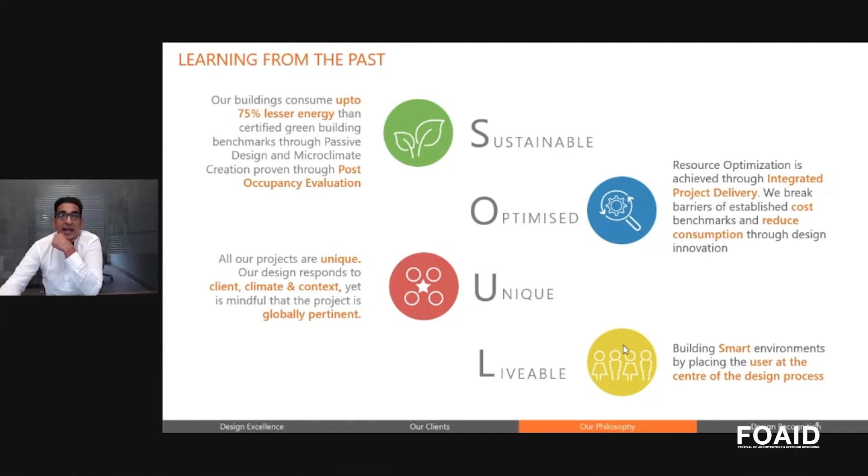With these 4 parameters, over the years till now, and then I'll come to our post-pandemic condition, we've successfully managed to reduce from green building standards 70% reduction in energy consumption by pretty much deploying what we already knew, but using computational strategies to be able to simulate and emulate high-performing vernacular buildings.

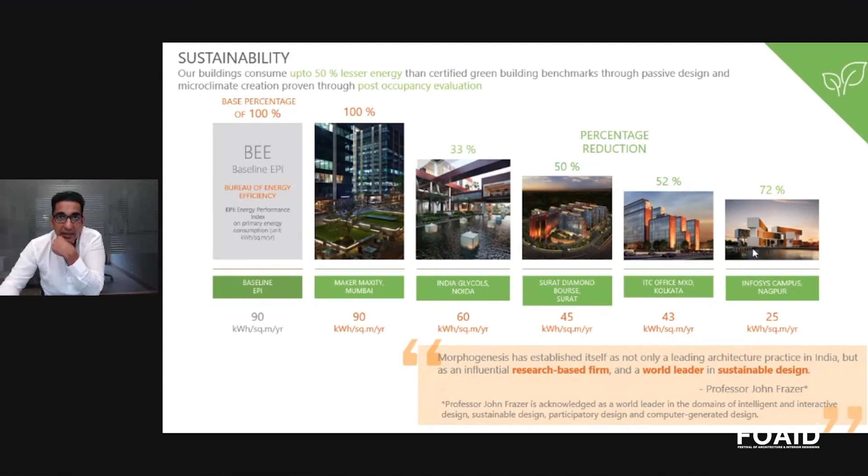In optimization, we laid down very strong performance criteria. We said we'll keep the cost of the project the same, because we don't believe that in this part of the world, a high-performing green building should cost more. If anything, it should cost less. With these metrics, all our projects began to follow suit.

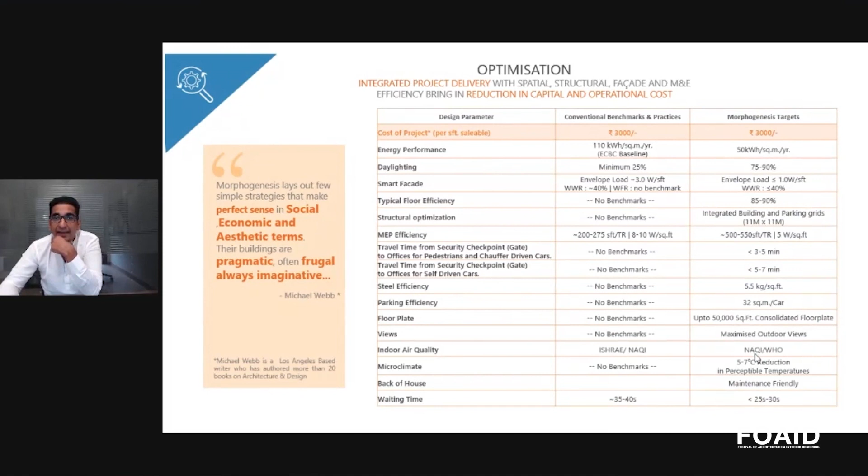Now, if you notice, a lot of these metrics are physical. They're based around energy, daylighting, facade performance, overbuildability, structural optimization, MEP. By and large, we discovered that you could take half of what we were really using and knock it out. We mapped a lot of other human factors of travel time, and this is all pre-COVID, and a lot of our projects were performing to these standards.

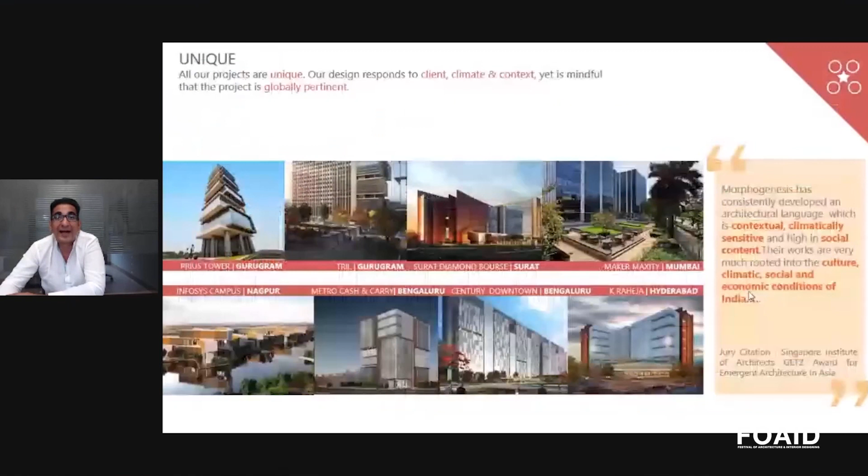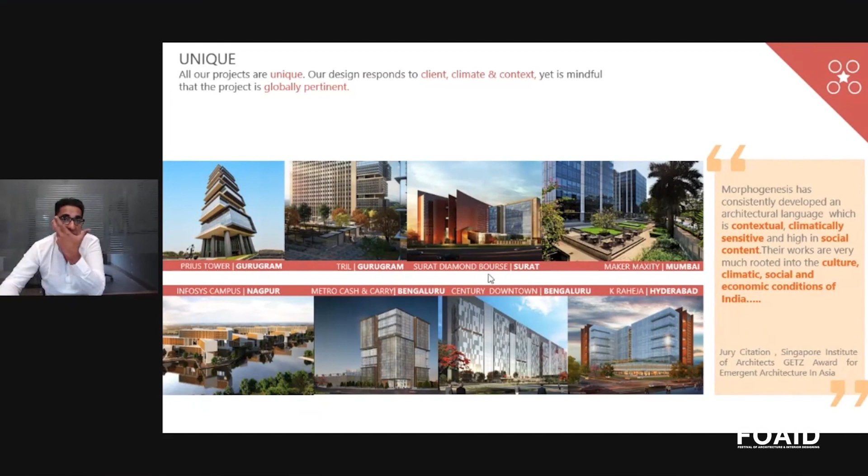And I will come very soon to why I mentioned this in terms of optimization. Of course, uniqueness I've spoken about. I won't take too much time here, but the idea really was that all the projects should respond differently to their typology, to their climate, and livability.

Last but not least, incorporation of highly useful outdoor spaces, but made comfortable through microclimate creation, ensuring universal accessibility and design, looking at every single horizontal plane that exists in the building, which is outdoors, and creating outdoor activities in them. Looking at a very strong relationship between the inside and the outside, infusing art and culture into architecture and making it available to the people in the city.

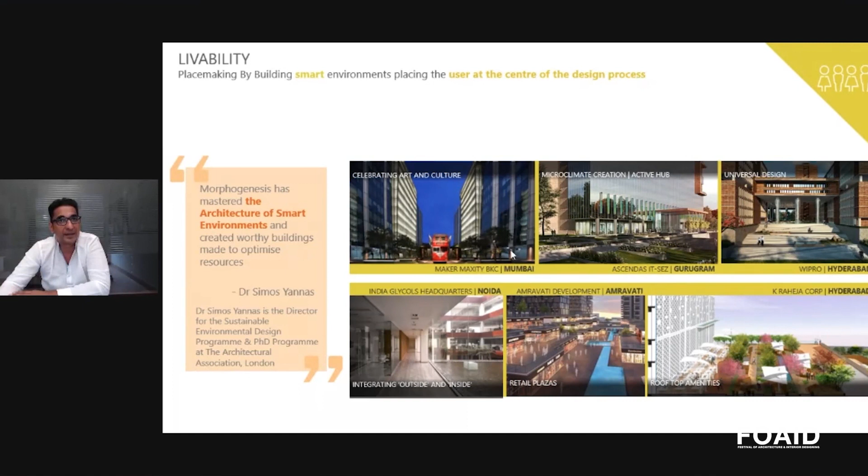This was our high focus for the last decade or two of practice in terms of sustainability and optimization. So, good passive design to save energy, good optimization to save cost and overbuildability, focus on the uniqueness and the local crafts of the area, and make sure people are comfortable and your buildings are highly livable. These are 4 projects that I'd shown last year, some complete, some ongoing, and we looked at them again.

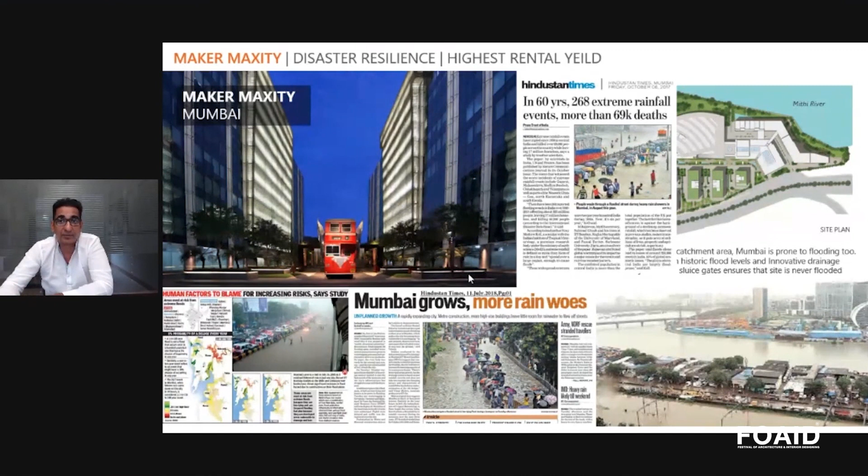Maker Maxity is a very famous complex in Mumbai, and to date, it has the highest rental yield in India, if not in most part of South Asia and the Middle East. That's simply because we focused a lot on those metrics that I'd mentioned to you, and it's become a favorite of people to come and work here.

The Surat Diamond Bourse, which continues its construction through this time and is approaching completion by next year, is said to be the largest office building in the world at about 70 lakh square feet as a single building. Even here, using those metrics of SOUL, we managed to demonstrate the savings that we pledged. Surat Diamond Bourse today has the largest application of radiant cooling, which allows more than half the building to be passively cooled.

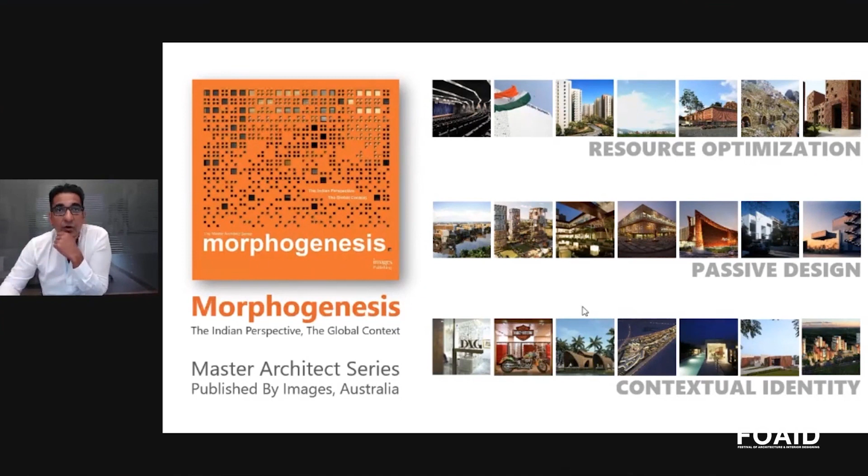Make it matter from FOAID. I saw the theme this time is 'lift the change.' We've begun to think that with what has transpired in the last 6 months, the world will survive global warming. The question really is of humanity. Will humanity survive? Lessons from the fact that when one human being has become a weapon for another, we need social distancing, and our very existence has become a reason for our own threat.

We started thinking now about moving a little bit more towards not only net zero, but more towards performative architecture. I'll explain that through 4 projects that more or less coincided in completion over these last 6 to 9 months.

One is a bit older, but it was interesting to see whether the philosophy we'd adopted for the last 2 decades would hold up to this new pandemic condition. Everything we had worked towards—if we were designing tall buildings, we were trying to move people up together in a very high density building—and now we're thinking completely the reverse. So how would these buildings work, and what would really be this new form of architecture we should be thinking about? It's an incredible shakeup, and I don't want to use the term opportunity, but yes, this is an opportunity we can't let go to waste.

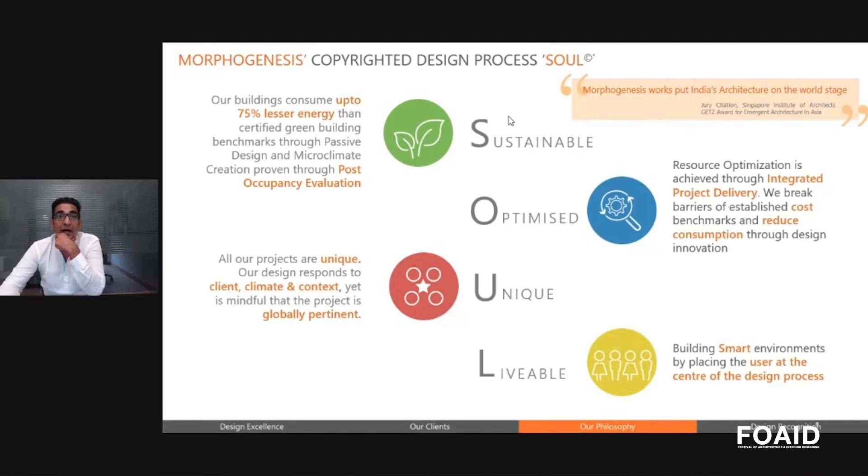I'm going to start now with our first project. This completed right in the middle of the pandemic. It's up in Rishikesh, in the outer Himalayan range, in a very difficult and inaccessible location. Difficult not because it's very pretty, but the real problem is getting material up there.

The big problem is a very inconsistent supply of energy. There's a community of people who live and work here and always have—they're not migrant. What was really interesting is that while all the migration was happening in India, that's normally how we build our buildings: a whole bunch of people come from one state to another, live in terrible conditions, and make these phenomenal buildings.

When we were doing this project, we were very clear about a few things. Forest Essentials, as many of you know, is a luxury Ayurveda brand, and all their products are made through the Ayurveda process. We decided that where the site was located, we'd work with the local community.

We focused on the fact that we would try not to look as much at the net zero aspect, but ask: can this really survive as off-grid hill architecture, as a prototype for self-sustaining off-grid hill architecture? Not on an electricity grid, not on a water supply pipeline—built entirely from local materials, with all discharge recycled within. The architecture itself embodies the very nuance of how the product, or what they were manufacturing there, comes to be.

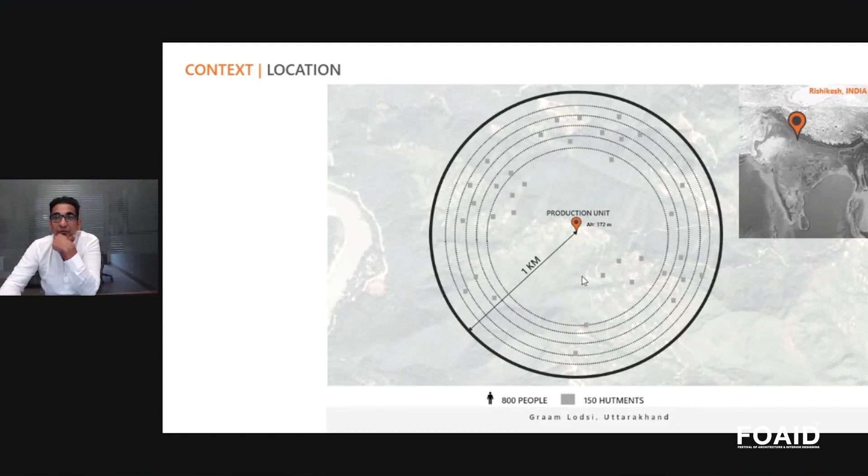Working with the community, we mapped out a radius of about 1 kilometer from the site. There are about 150 hutments, about 800 people, in this village called Graam Lodsi in Uttarakhand. It's a very pretty site, but very inaccessible. Most construction in this range is done in a very traditional method. Lifestyles are very local, with very little material coming in and out of this region due to transportation issues.

And the lifestyle is pretty happy. People are comfortable there, and even now, highly unaffected by this sort of pandemic condition. They foraged for local herbs, and they pretty much consumed what they built.

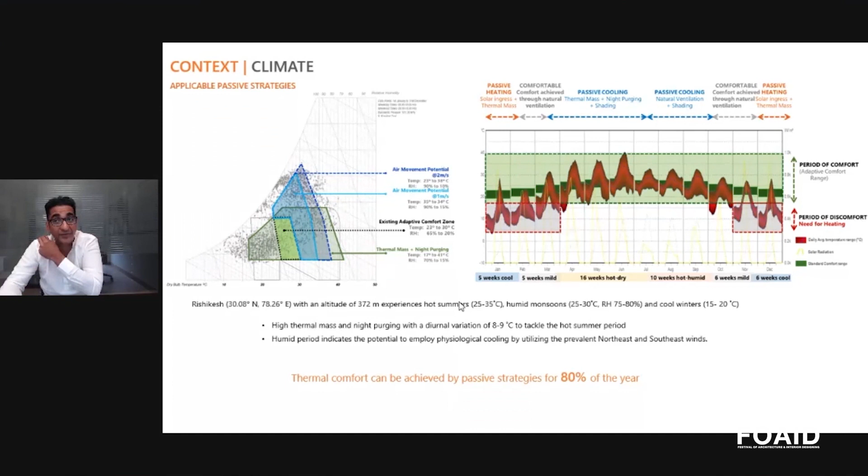Of course, we did our studies on the climate to see how we could pursue this notion of off-grid hill architecture, and further, if it does work, can it contribute to distributed manufacturing so people don't have to leave their villages and come to cities to work in complex and large factories in bad conditions? Could we really decentralize manufacturing in India by relying on principles from the past, working with the climate and local ecology, and set up a completely different form of distributed supply chain system?

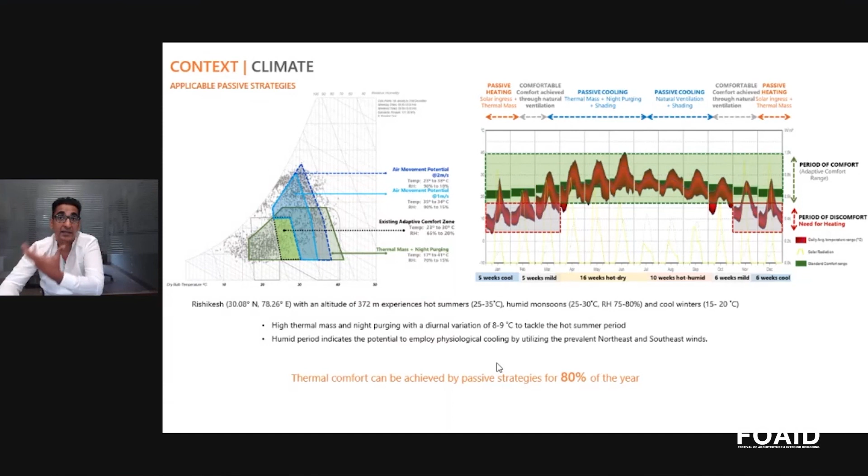So I won't take too much time here. Of course, we studied the climate, and we worked out that at least for 80% of the year, through passive strategies, we could make this building, by and large this manufacturing facility, work off-grid.

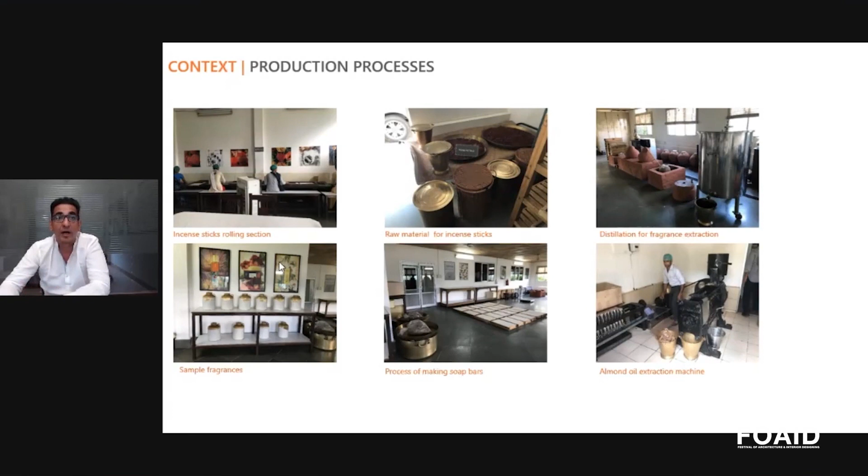Of course, the production processes involve making incense sticks, raw material, fragrance. So there are many processes which have very different requirements in terms of humidity and temperature, and how the whole product is made. We then mapped out for each of those spaces exactly what we were really looking at.

In terms of sustainability, I've already spoken about this. We were very clear that the materials we would work with would all be local, local stones. In fact, some of the stone is excavated from the site itself, and the employment would be with all the local people. So it would be more a community project that works towards making this Ayurvedic luxury product, which is pretty much sold all over the world.

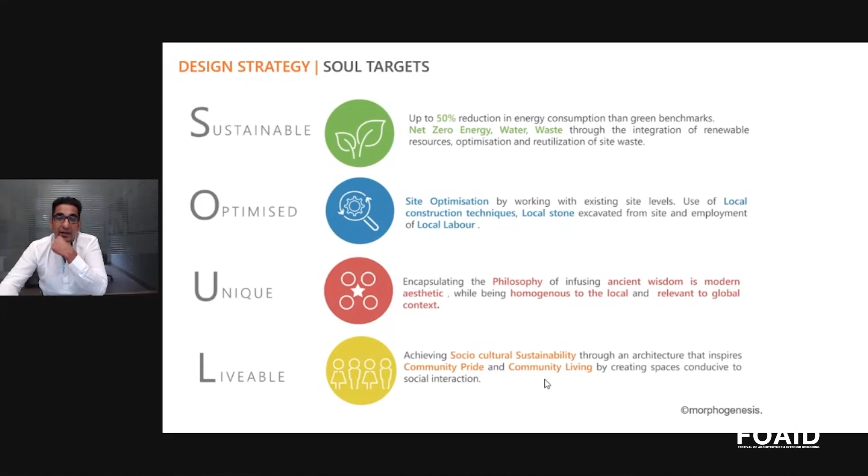And it's that story really that ties it as a model, so the Indian perspective within the global context. The aesthetic would be an emergent quality of that kind of process of really working with the local. And of course, a lot of community pride, community living, and then the people who build it will work in it.

So in terms of how we went about the form optimization, we worked with the slope. We worked the slope out. We had a central courtyard, a south-facing roof where we had our solar panels for generating the energy for most of the production going on in the building. The building itself being net zero, and in fact we eventually ended up being energy positive.

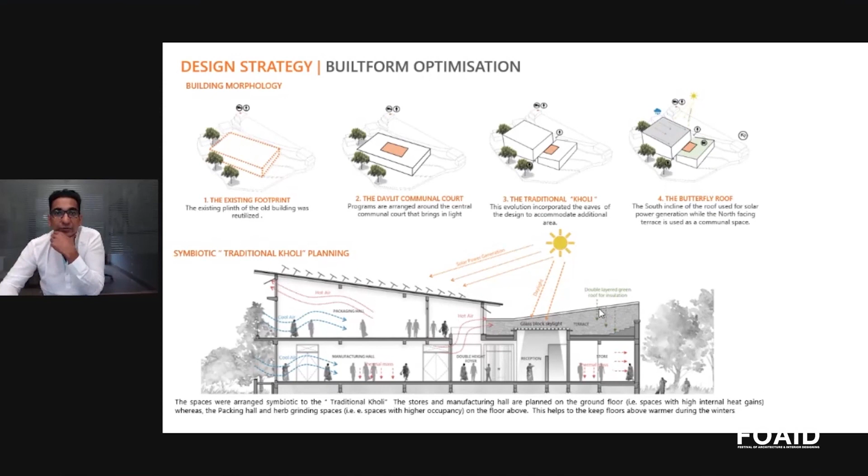We worked a lot also on the envelope optimization in order to achieve those metrics for it to be off-grid. We looked at various forms of construction, from single-leaf brick wall to different window-to-wall ratios, and eventually we ended up with a window-to-wall ratio of about 25% with double stone brick cavity walls, achieving good U-values.

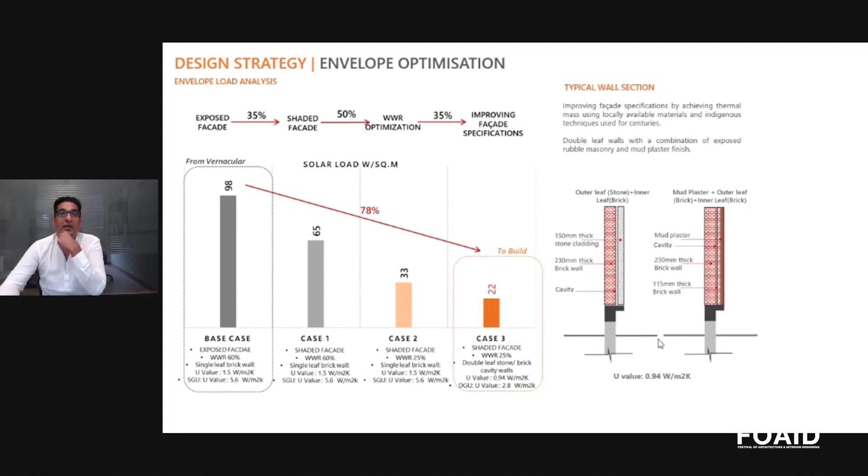By and large, we weren't going to use any expensive insulation brought in from the cities or from far away. So just working with the local technique and getting the right U-values to be able to get the envelope optimized.

And through a very natural and open section allowing for manufacturing, packaging, outdoor drying, and office space, we allow for this whole performance to happen with very different criteria, but using passive design.